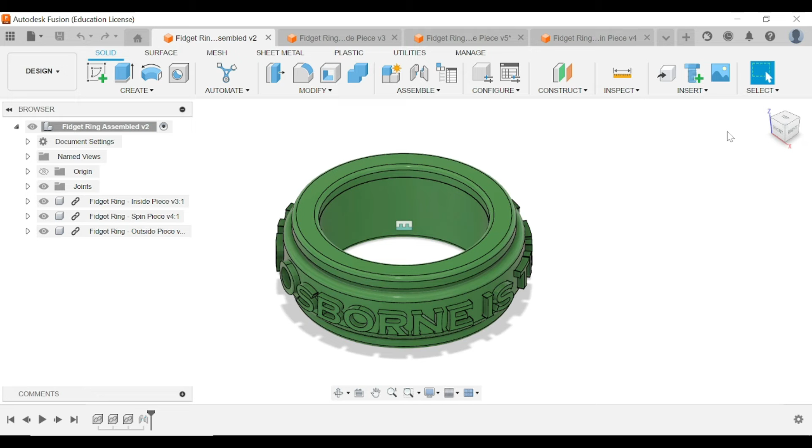So in this video, I'm going to be showing you how to create a fidget ring, just like this one. You have three components for this: your outside piece, your inside piece, and then the piece that goes around. And when it's assembled, it looks like this.

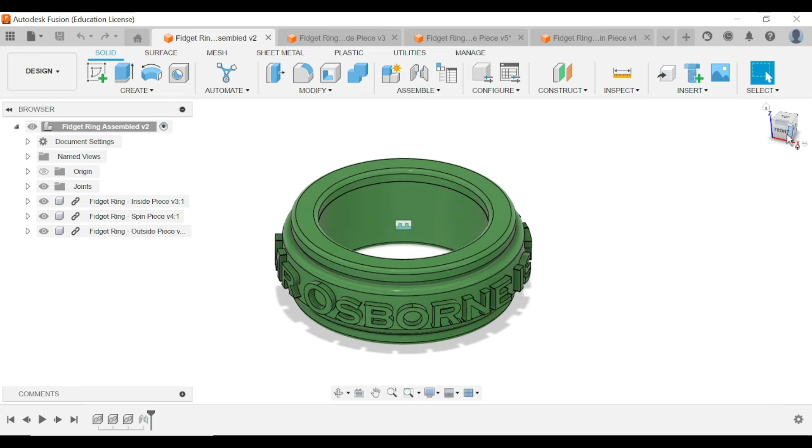Now you're going to be 3D printing it as three separate components, but I've assembled it anyway, just to see if it all fits together before 3D printing it.

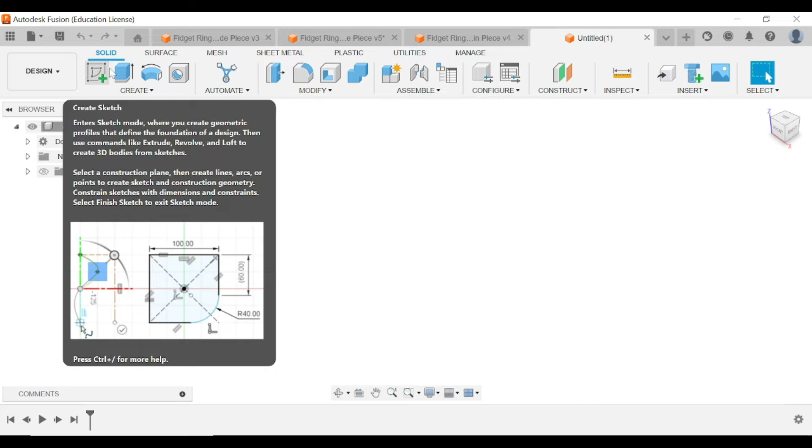So the way we make this is, if I'm on a fresh page, new design, I can go create sketch and start making what I want to make. So just like we did for the dice, we need to click create sketch up here, and click on the bottom plane. It will make things a lot easier.

We want to create a circle that is exactly 25 millimeters. Now, of course, your finger's going to be a different size. However, we can change the sizes in the slicer software before we 3D print, so you can just do it exactly as I do, and then scale it down to the size you want. So I've got a circle here that's 25 millimeters.

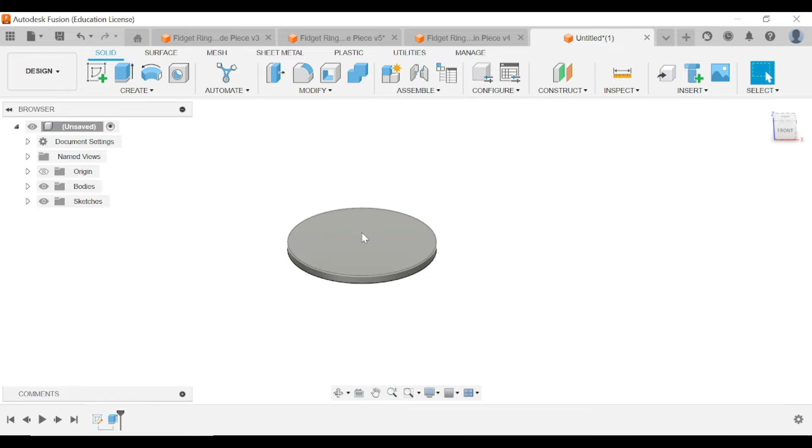I can now go finish sketch, and then extrude it up to how big I want. So I'm going to click on extrude right here, and I'm going to make it 1.5 millimeters.

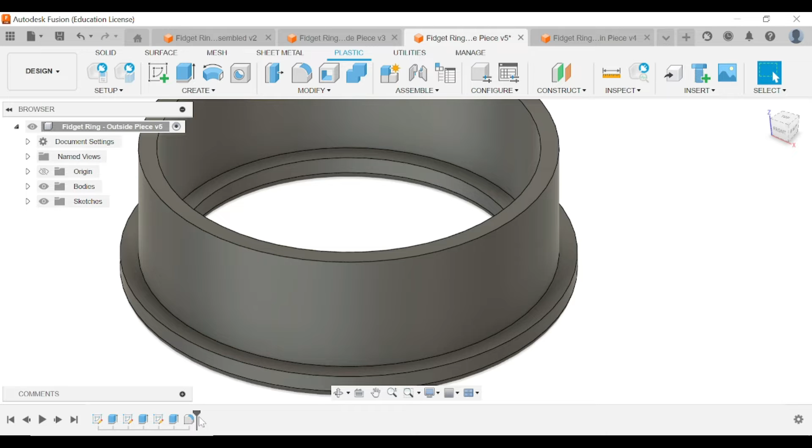You'll notice in this one that I have this outside piece right here, so there's something for the spinning piece to sit onto, so it doesn't just slide off. What I need to do next is create the inside circles so I can extrude it up - this is the part I'm creating next.

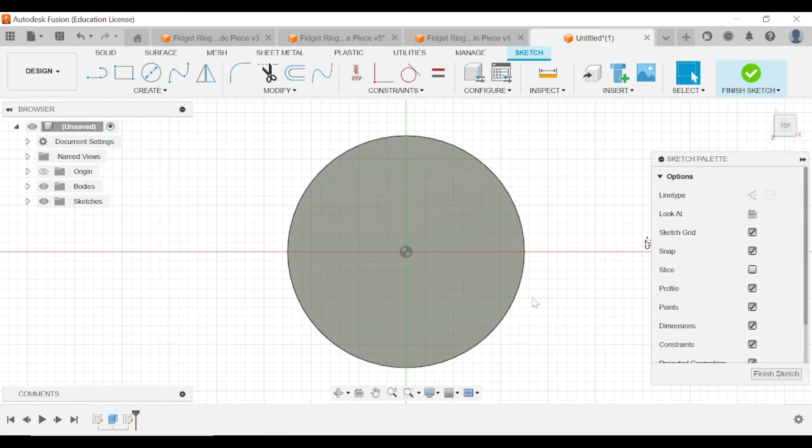So how I do this is I need to go back and create sketch, and do it on the top surface right here. I'm going to click on this top, and it brings me to here. Now I want to go back to the circle, and make this 23, so I've got an inside circle that is 23 millimeters.

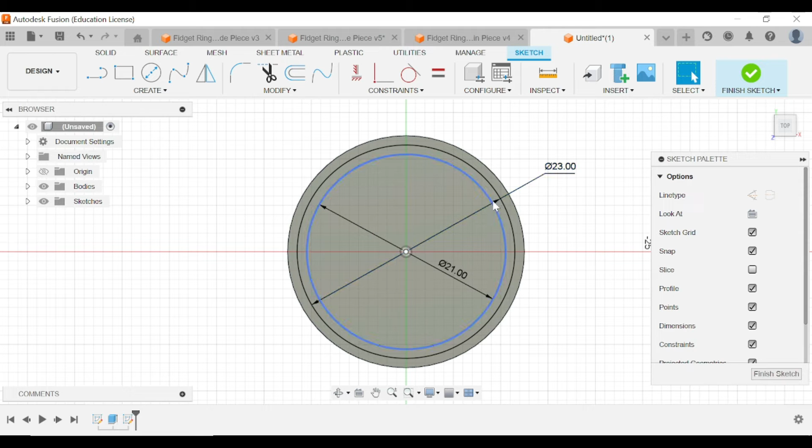I want to grab another one, and make this 21. So now I have two circles: this one's 23 and this one is 21, and that's on top of my little piece right here.

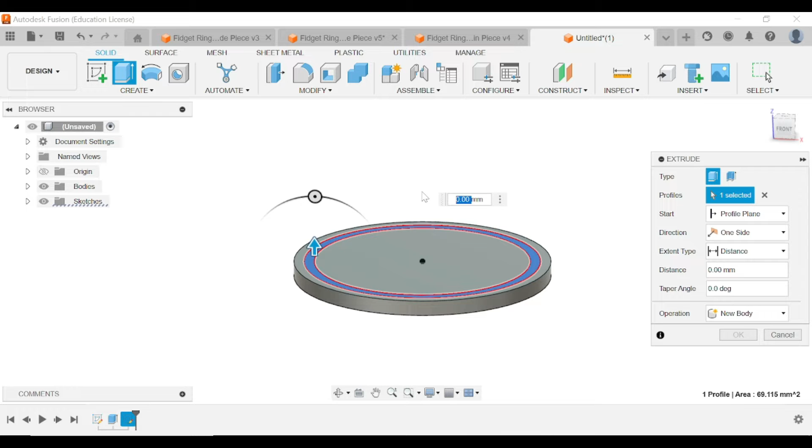Now I want to go finish sketch, then go extrude, and click on this center one right here, and raise it up by 7 millimeters. So 7 millimeters, enter - and what I've got now is this piece right here.

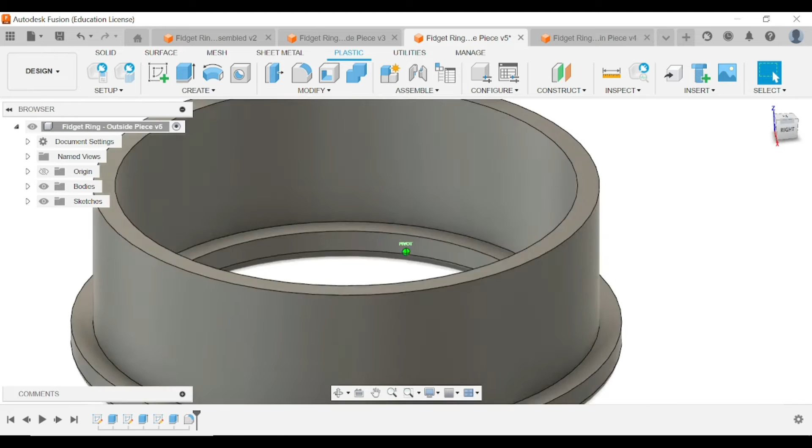So now I want to make the inside part here. When I look at my other one, I've got an inside component - this is for the one that goes around. This is the big one, this is the one on the outside. So I've got one that goes outside and one that goes inside. I'm doing the outside one at the moment.

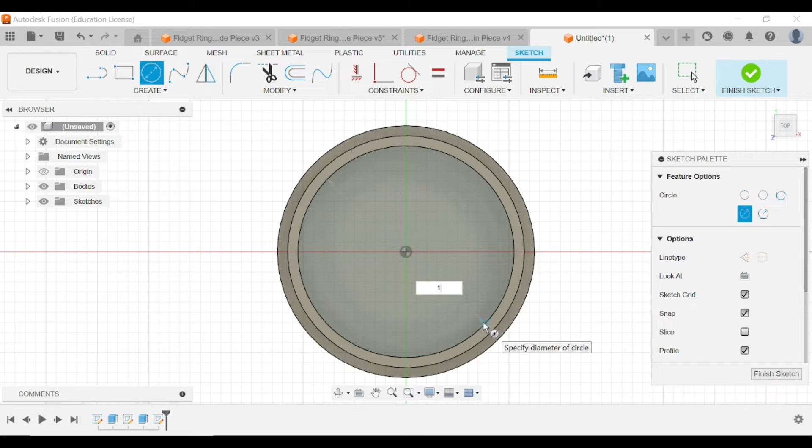So if I go back and go to new sketch, create sketch, and click on this bottom right here - clicking on the bottom right here. If I go back to the circle and make this 19 and press enter, this is what I have.

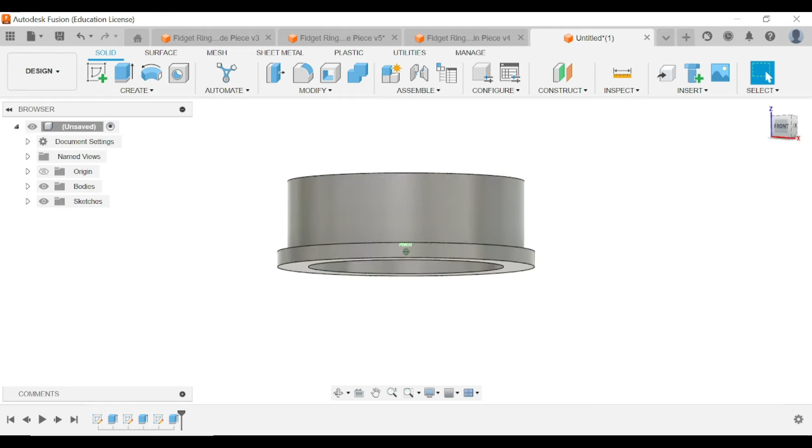Go finish sketch - so I've got a 19 millimeter circle that's inside. Finish sketch, then I want to extrude cut this. So click on that, click on it down, and then extrude cut it. So I've got this component right here - that's that, yeah.

So that's what this one is. These are the exact same components - both of these are the exact same. However, I have got a fillet on these ones as well, so I might show you how to do that quickly.

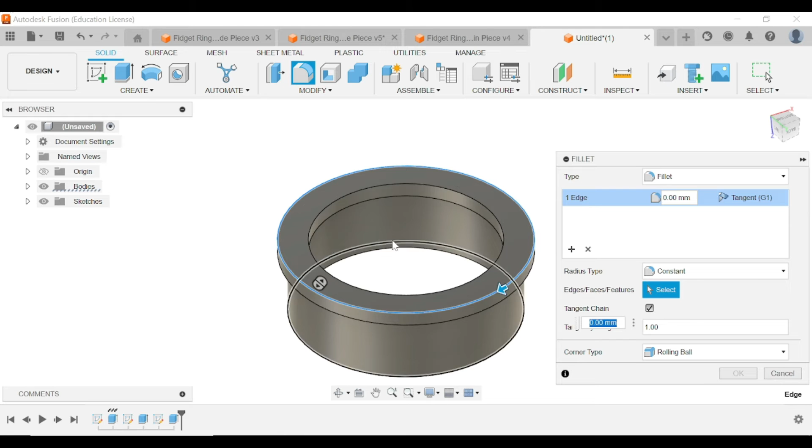So now if I want to add a fillet to these ends right here, I go to fillet, click on this outside part, and click on this outside part, and maybe do a 2 millimeter fillet. No, not a 2 millimeter, that's too much - maybe do a 1.

So a 1 millimeter fillet. Yep, that's good. I'm happy with that.

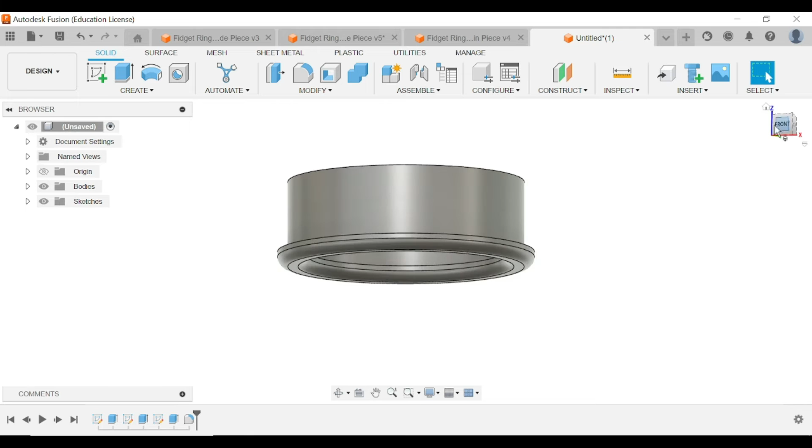Awesome. So what you need to do now is save it. Go to save, find your digital technologies folder, and make sure you have a folder for your fidget ring project. I've got my Digital Tech 2024 folder, and inside that I've got a fidget ring project folder. Create a new folder and save it in there as fidget ring outside piece.

I'll now show you how to create the other piece. This piece is very similar to the other one, however I need to make this bit inside here so it will slide inside the other piece. So new design. Go new design, create sketch, and do it on the bottom again.

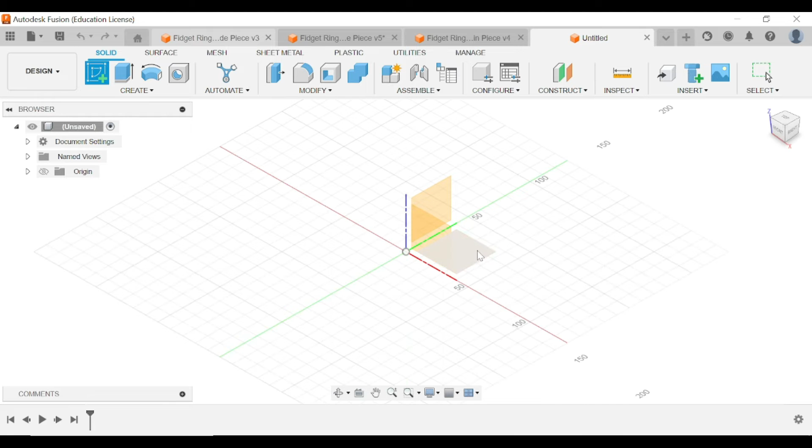Then I can go back to my circle tool and create another circle that is 25 millimeters, the exact same, 25 again. I'm happy with that, so I'll click finish sketch. So a circle that's 25 millimeters, and then I can go extrude and do 1.5 just like the other one.

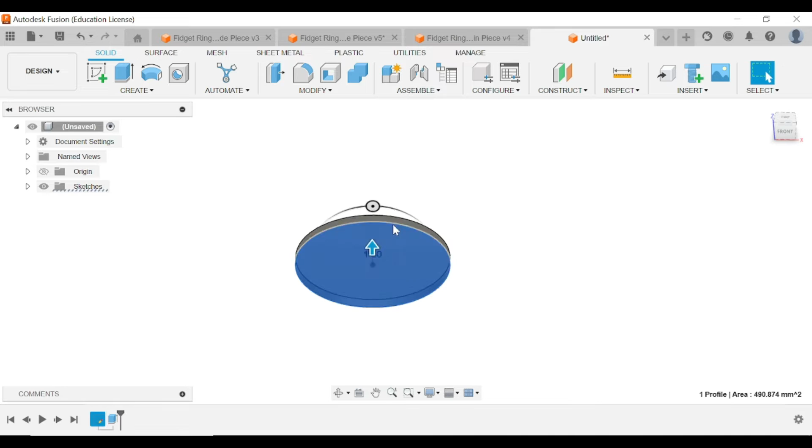So pretty much I've done the exact same as the other one, but I'm going to make that wider inside. What I can do now is go to create sketch, click on the bottom, get my circle again, click inside here, make sure it's centered, and now I want to make it 20.95.

I'll do 20.95 because I know that works well, so it will slide into my other component pretty nicely. It's not going to be too tight and it's not going to be too loose. If I did 21, it would make it the exact same size as the other one and it'll be too tight, you'll have to really squeeze it in. But 20.95 I know works well.

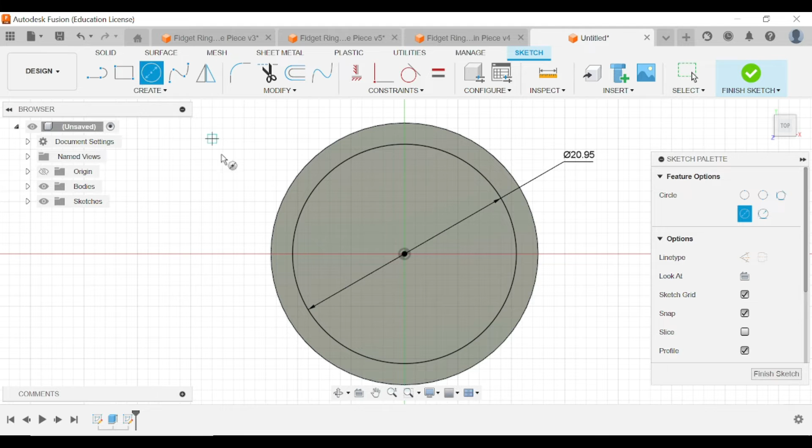So if I go back to this sketch right here and go back to my circle tool, make it 18.95 so that it's 2 millimeters thick. That's 2 millimeters thick right there, and go finish sketch.

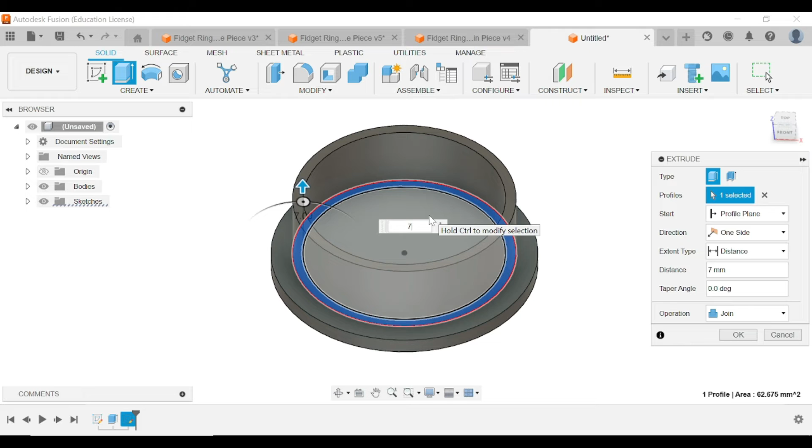I can now go to extrude and click on that center one and make it 7 millimeters just like the last one. So now I've got this component right here, and I need to get rid of the bit at the end, this base right here. So I can just go extrude, click on it, drag this down and extrude cut it. And that part is done.

So what we need to do now is save this. Click on save again and save it as fidget ring inside piece. Find your digital technologies folder, find your fidget ring folder, and save it in there as inside piece, fidget ring inside piece like this, press save.

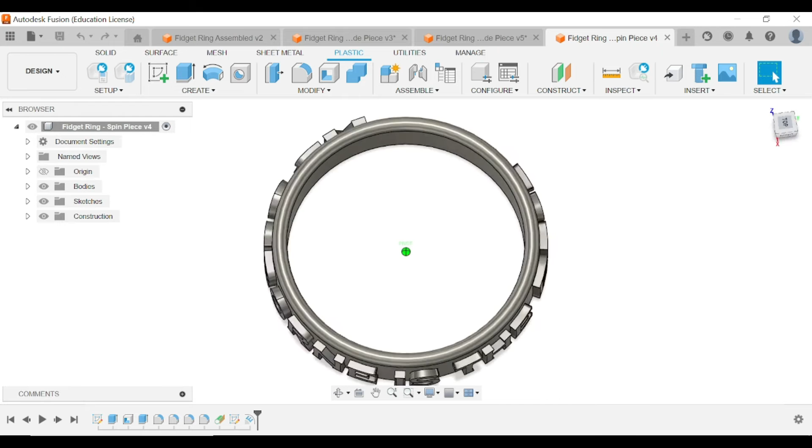So now we've created these two pieces right here - we created this piece and we created this piece. Now what we want to do is create the outside piece right here. This isn't too hard to do. All we have to do is create a circle, and I'll show you how to do it anyway.

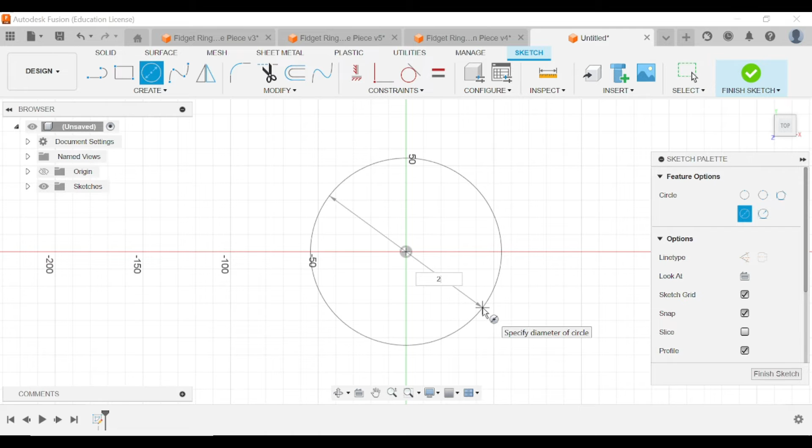So if I go new design, create sketch, click on the bottom plane, and go to the circle tool right here. I'm going to make it - what was it, 25? I'm going to make it 27. Actually, that might be a bit too big. I'm going to go 26.9, I know 26.9 works well for it.

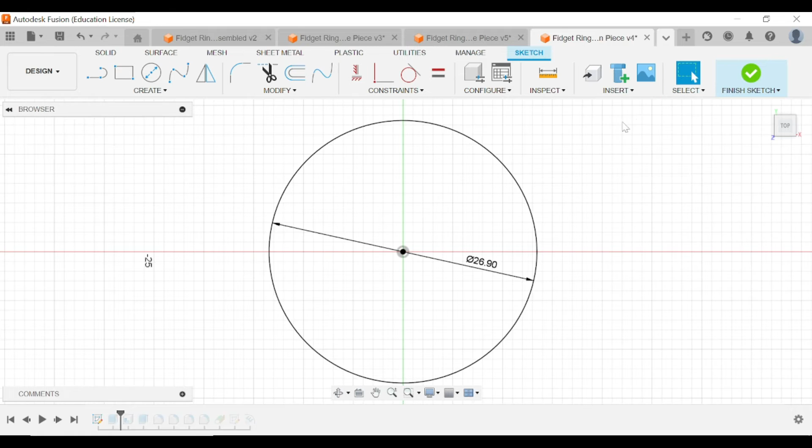It's not too big, it's not going to fall off, and it's going to nicely spin around. So I'm going to make it 26.9 because I believe that's what I did for this one. Finish sketch, and now I want to extrude this up. I'll go to extrude and make it 6 millimeters - pressed on extrude right here, and put in the number 6 millimeters, just like this.

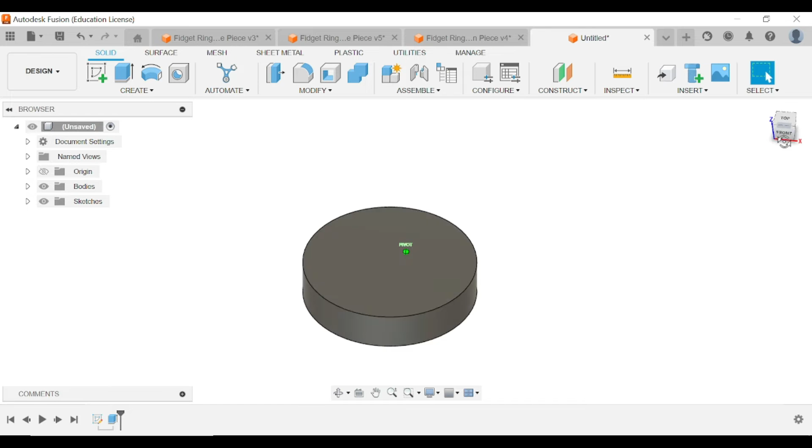So now I've got this part right here. What I'm now going to do is use a tool we haven't used before - the shell tool. If I go to shell, we've got these tools up here, this is called shell. If I click on this and click on the top, I can put in the number 1.5 millimeters, and that's going to give me a 1.5 millimeter hole inside of it.

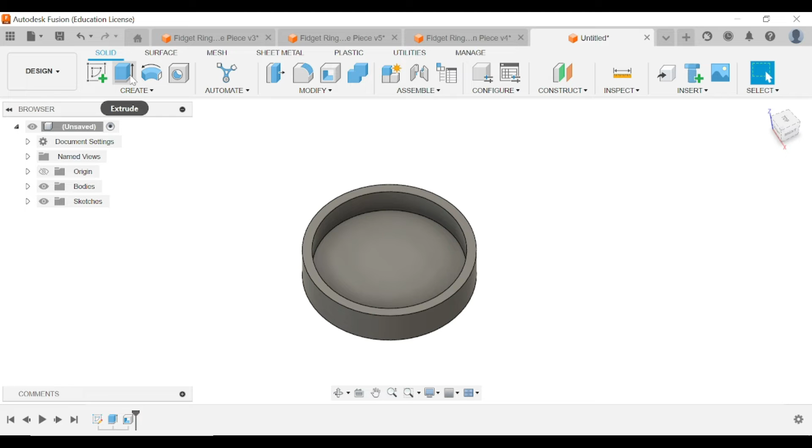And now I can go to extrude, click on that, and then just drag it down and cut it like this. So I just created a nice little hole in it and then cut the inside out.

So I went to shell, clicked on the top, wrote in 1.5 millimeters, and then extruded that base part down to extrude cut it. And this is what I got here.

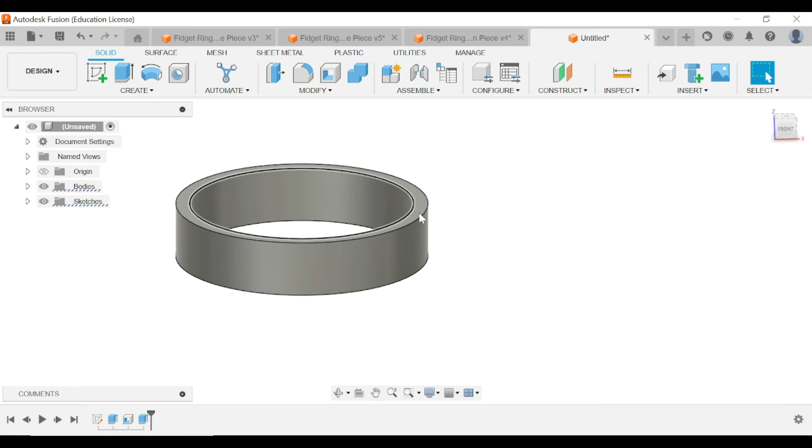So what we want to do now is our fillets. We can fillet the edges right here. So I'm going to go to fillet. This top one right here, it says fillet. I'm going to click on the outside and make this about 0.5. You can make it maybe a bit bigger if you want to, 0.7. About there, that would be good.

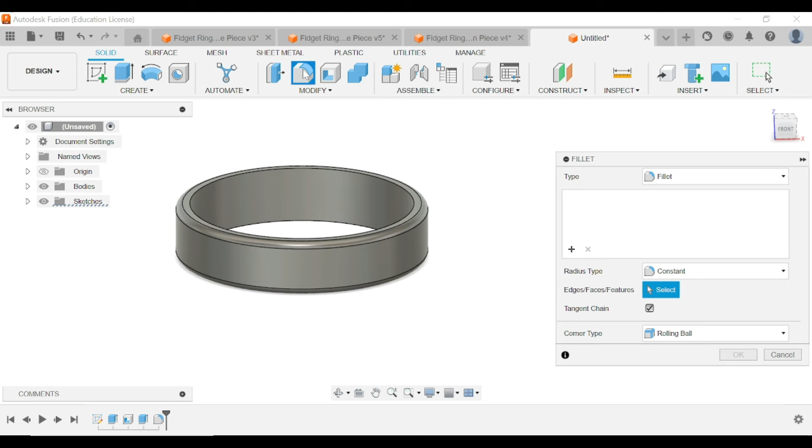Now what I want to do is go back to fillet and do the inside lines. I'll do 0.5, or we could go 0.7, that would work actually. So now they're both 0.7 and I've got a nice little fillet on the ends of my ring right here.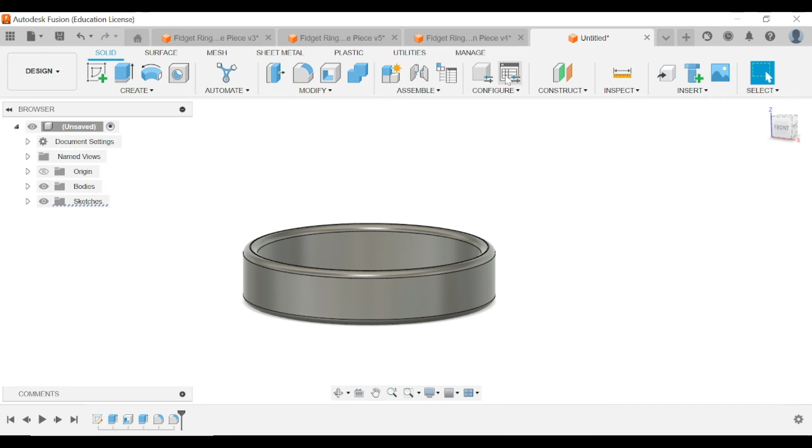So what I can do now is write the text. So what I want to do now is the text. If I go to construct and tangent plane, I can't just click on create sketch and click where I want, I need to do a tangent plane. So I'll show you what I need to do.

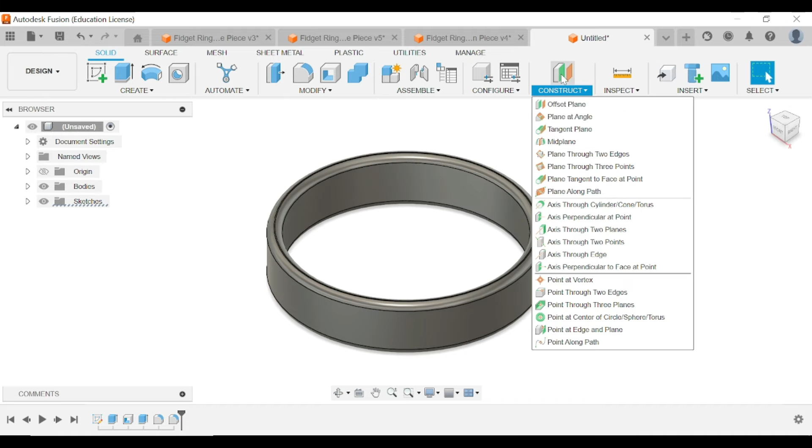So I need to go to construct and then tangent plane. This one right here, construct, then tangent plane, and then click on the front right here. Right here, and then go OK.

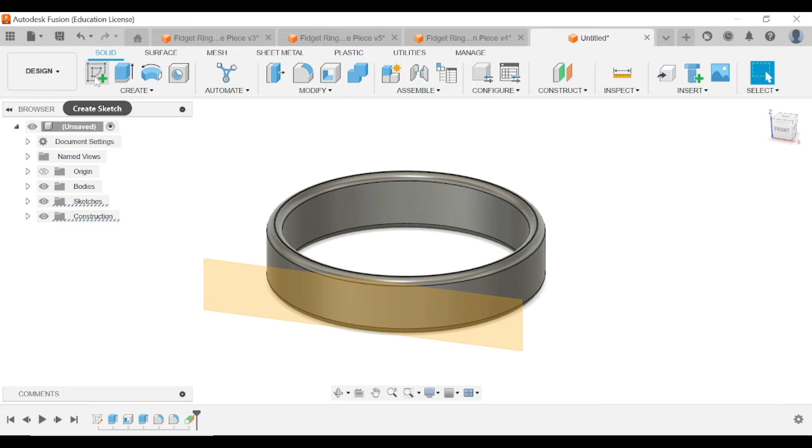So I've just clicked on the front, clicked OK, and now I can go to create sketch and click on that tangent plane right here. So go create sketch, this plane right here, and now I can start drawing on this plane.

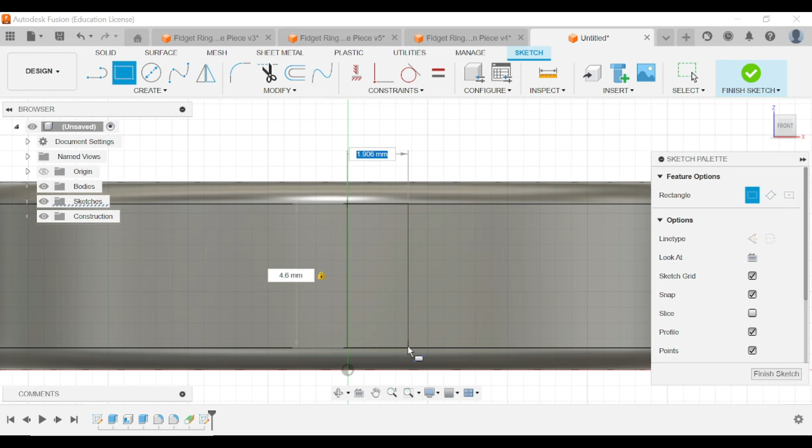And if I go to the rectangle, place it about there, tab 4.5, or maybe 4.7, whatever it is, 4.6, okay, 4.6, and then that needs the circumference of the ring. The circumference I think is about 84.5. So I've got a nice rectangle right here, which is meant to be about the circumference of the ring.

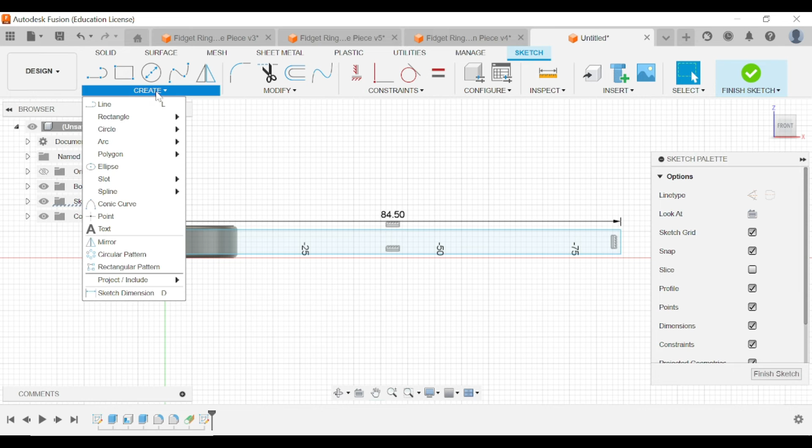And I can now go text. So I can go to create and then text right here. So what I just did was I went to create and then text, and now I can click

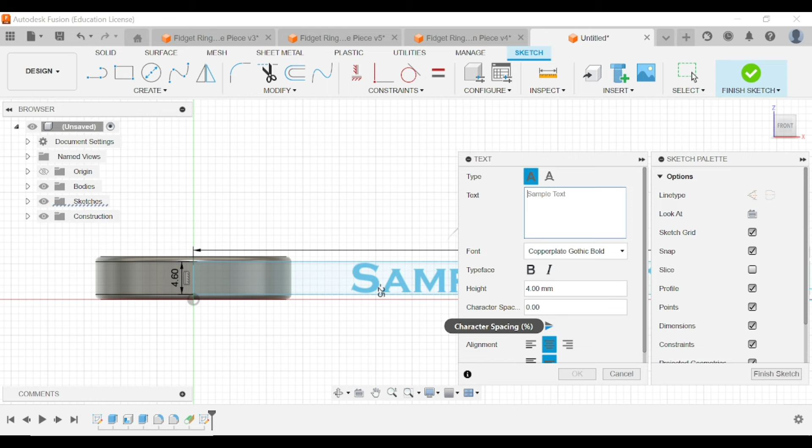right here and I can drag that out and drag that out to here. So now what I can do is write in my text, whatever I want to write on my ring. So if I write Mr. Osborne,

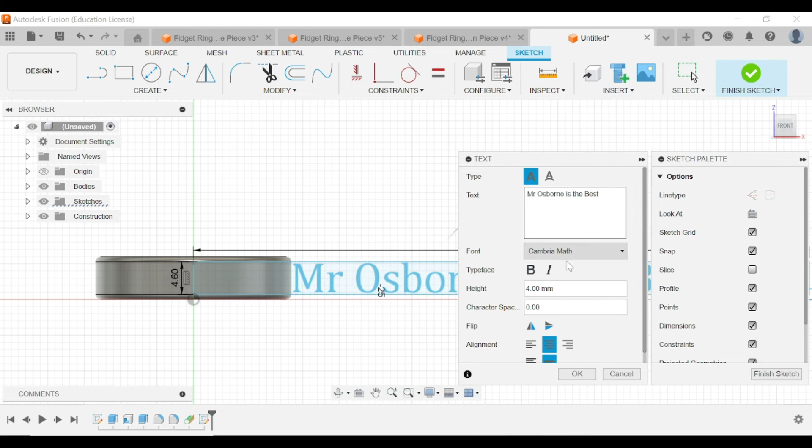just do that. I can now change my font. I can make it whatever font I want to make it. Maybe I want to make it this font, maybe I want to make it this font, whatever font I want to do. Something that's nice that will actually stick out on the ring.

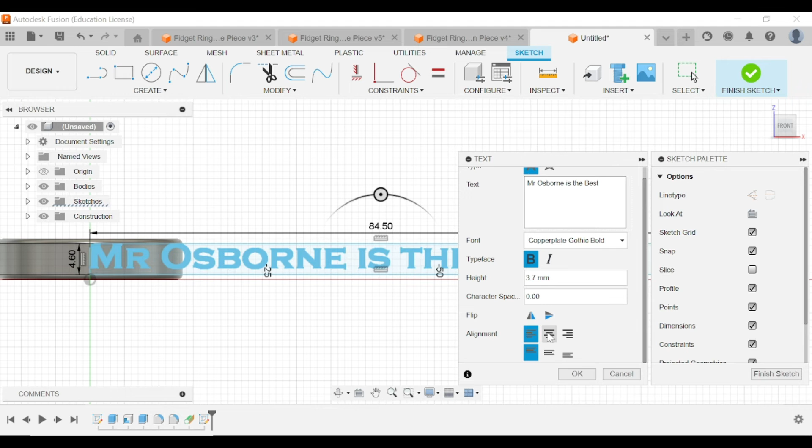So maybe if I want to do 4mm, maybe I want to make it bold. Maybe I want to make this a slightly smaller, maybe I want to go 3.7. And I can also go alignment, I can go center, and then I can put it in the center. So it's going to be directly in the center, okay.

And what I can do now is finish sketch. So once I'm happy with my writing, I can go finish sketch, and I can go to create. So this is what I've got now. It's not on the ring yet, I need to put it on the ring now.

So I need to go create, and then emboss. This one right here, emboss. So I've clicked on that. I want to first click on my text, and then go to faces, select on the faces and click on the ring.

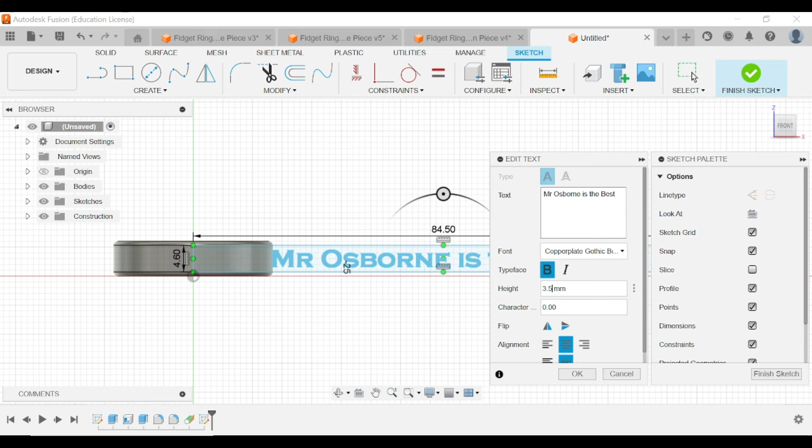Now this text is apparently too big, so what I need to do is go back into it, go edit sketch, and make my text a little bit smaller. So if I go 3.5, go finish, go back to emboss and try it again.

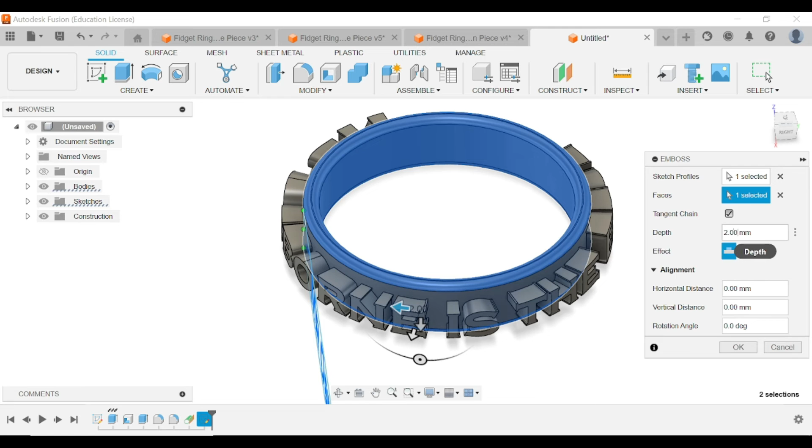And now I've got my text on the ring. However, it's sticking out way too much, so I need to adjust that to how much I want. If I click on this depth right here and make it about 0.7, it's going to stick out by 0.7mm, or maybe 0.5, however thick you want your text to be. Don't make it something stupid, make it above 0, probably below 1, because I think even 1 is pretty big. So something below 1, 0.7 perhaps.

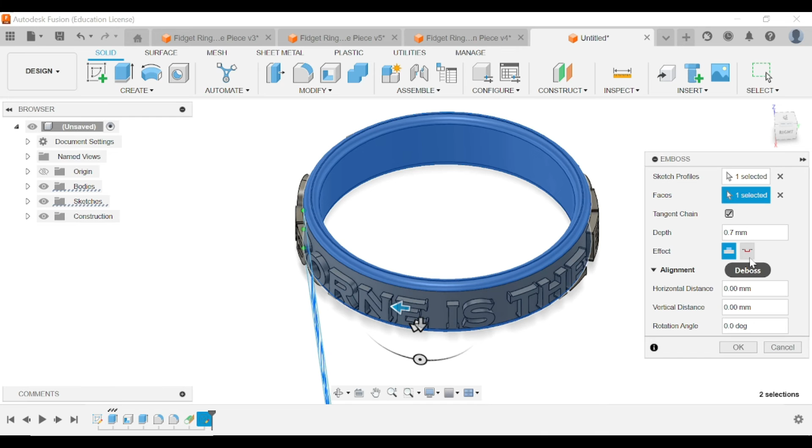Now you can also make it inside, you don't have to make it outside. If I go this one right here, it's going to cut it inside. So it's up to you if you want to do it outside or inside, what you want to write on your ring, if you want to do that, and how deep or thick you want it to be.

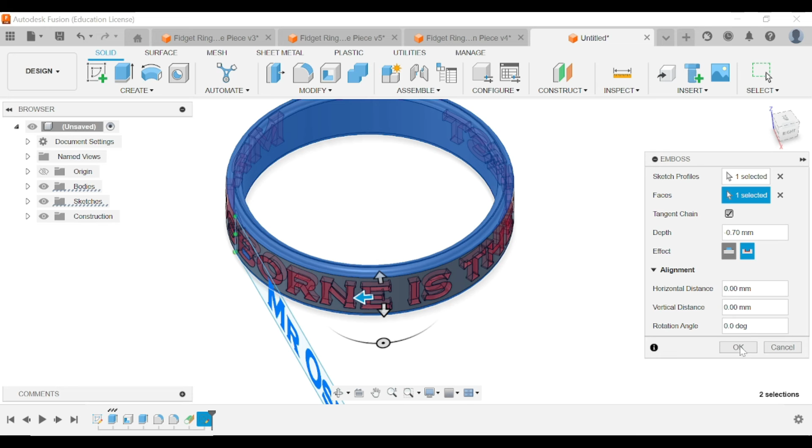So if I go 0.7 like this, once I'm happy with it and click OK, it's going to look like this. I've got that nice little writing on the outside now, and it just says Mr. Osborne is the best.

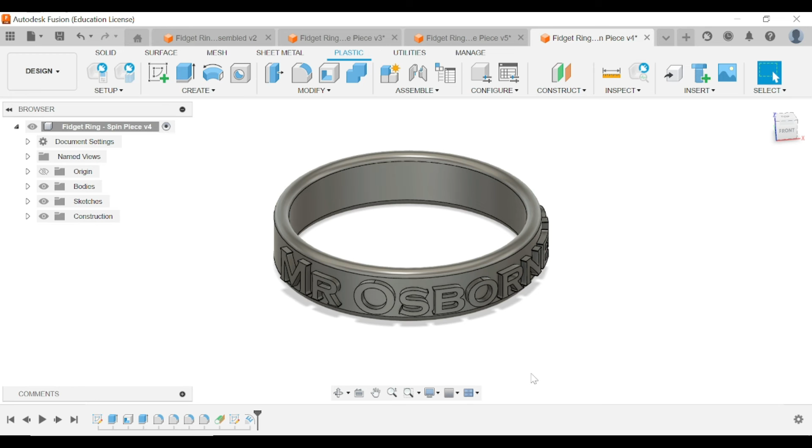You can play around with this, see how big you can get the text, try to make it a little bit bigger. Although if it comes up with an error message, you made the text too big and it won't fit. So you just have to play around with it until you get it right. You can make it say whatever you want, it doesn't have to say that, you can say whatever.

Now what you can do is actually assemble them, if you want to put them together, and make sure that all the pieces fit together. So if I go to New Design, and click on this right here, I can find where they're all saved.

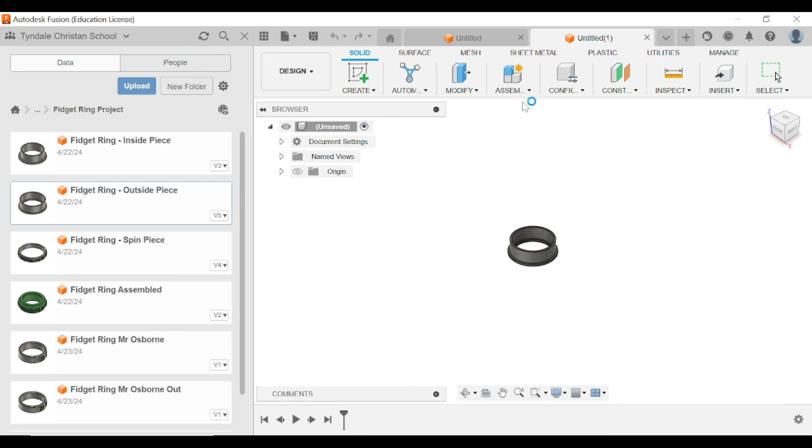Perhaps I want to get my outside piece. If I want to drag my outside piece into here, I can. I can now put that where I want to put it and press OK. I can now drag in my inside piece.

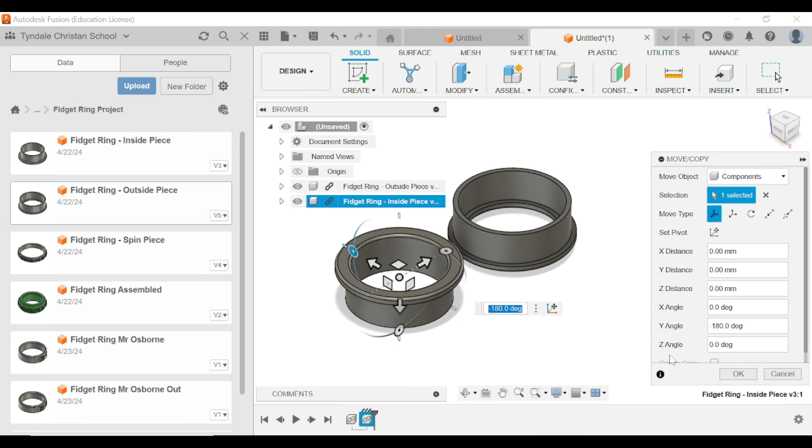So now my inside piece is here, however I need to put it in position. I can use these lines right here to drag it where I want. I want to turn it around 180 degrees. Good, and now I want to put it roughly in the position it would need to go into.

So now I can drag it roughly in the position, and when it's roughly in the right position, I can click OK.

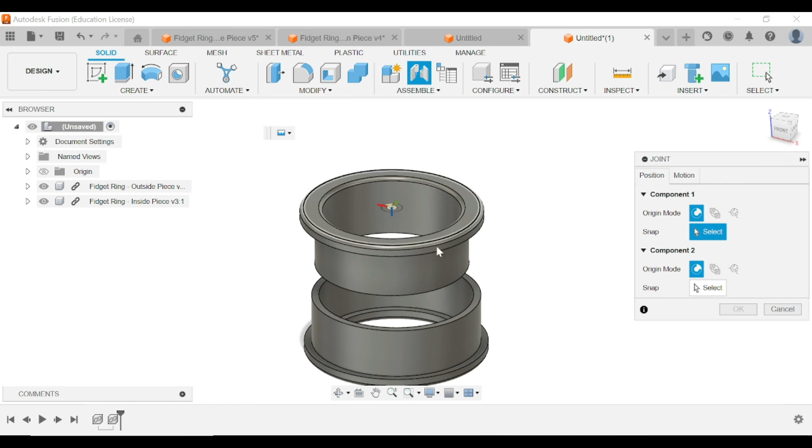And now what I can go to is joint. Press on joint, and I can press on this inside line here, and then this inside line here, and line it up just like that. You can see how well it would fit together, it looks like it would fit together pretty well.

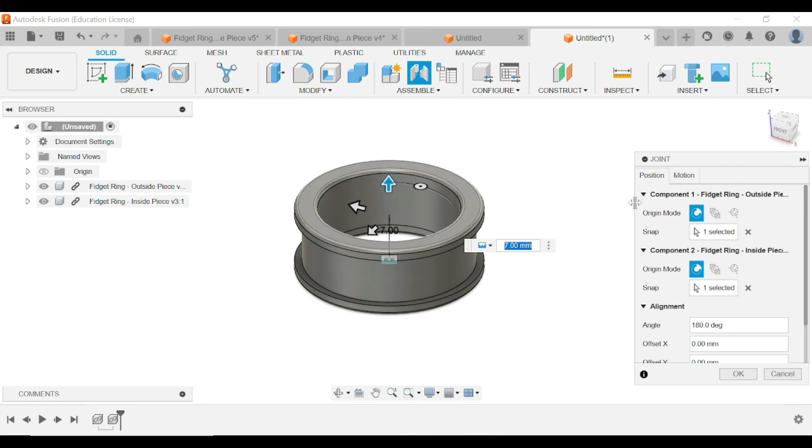I can now maybe slide this in here like this, and you can see that will join up like that when we actually put it together in real life.

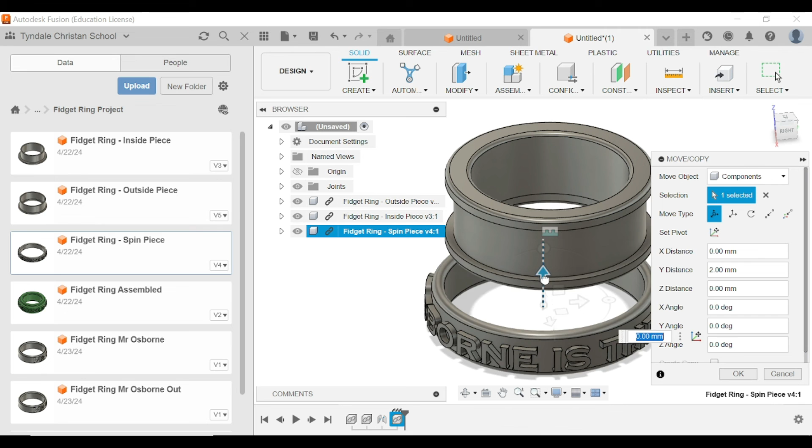Now we can see how well the spinning part will fit around. So if we go to Fidget Ring Spin Piece, click that in here and put it roughly where it needs to go. We can try and play around with it until we get the right spot. So that looks like the right spot to me.

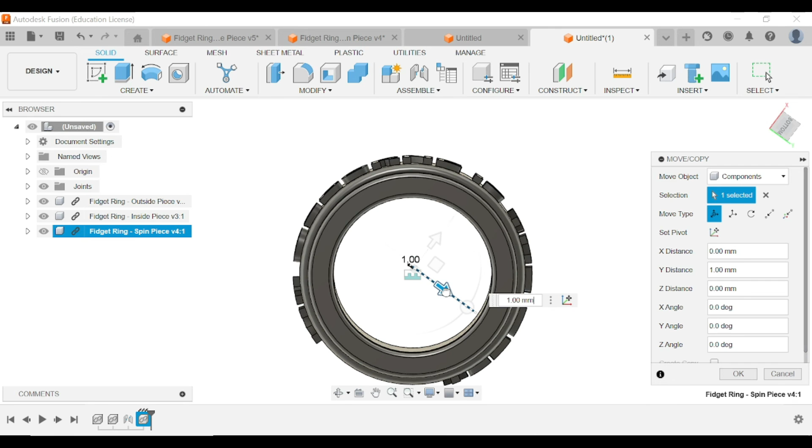And now we can have a look at it to see how nicely that will fit inside there. I think that looks pretty good, I think that will fit nicely. And that's what it looks like when it's done, this is what it will look like once it's together.

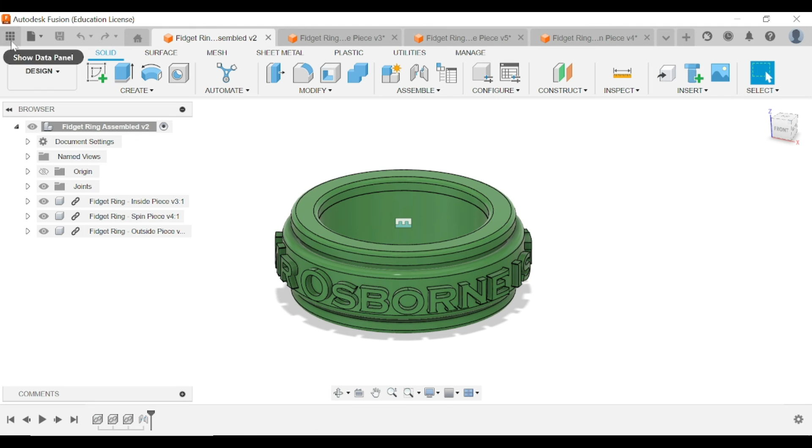Awesome, so once you have all your pieces, you need to save them as an STL file. I've got them all saved, but I also need to go to export and call it what I want to call it. You want to save all these pieces, not your assembled one, you want to save all these ones.

So you go to save, you go to export, you'll call it what you want to call it and go STL. Then you'll put it where you want to put it, find the location you want to save it into, and then you'll have all of them as an STL file, and this is how you 3D print your components.